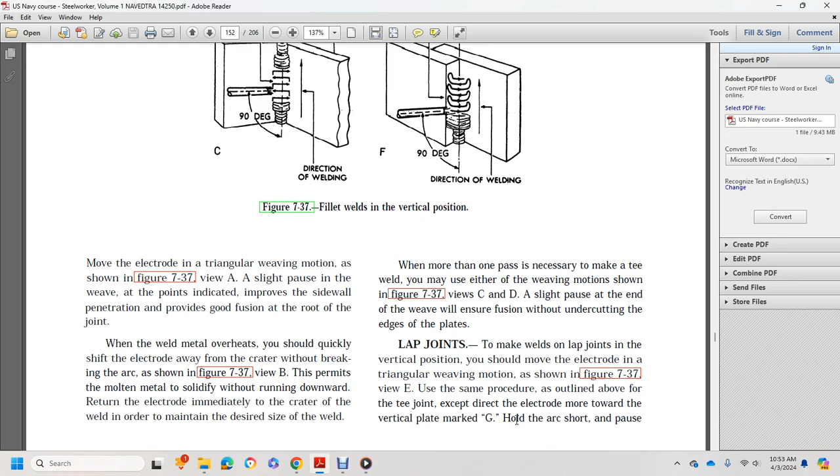Alright, lap joints. To make a lap joint weld in the vertical position, you should move the electrode in a triangular weaving motion shown in figure 7-37 view E. Use the same procedure outlined above for the T-joint, except direct the electrode more toward the vertical plate marked G. Hold the arc short and pause slightly at the surface of plate G. Try not to undercut either edge, and allow the molten metal to overlap the edges of the weave.

Lap joints on heavier plate may require more than one bead. If it does, clean the initial bead thoroughly. Place the subsequent beads as shown in figure 7-37 view F. Precautions to ensure good fusion and uniform weld deposit previously outlined for the T-joints also apply to the lap joints.

Alright, butt joints. Prepare the plates used for vertical welding identically to those prepared for welding in the flat position. To obtain good fusion and penetration with no undercutting, you should hold a short arc, and the motion of the arc should be carefully controlled. Butt joints beveled 1/4 inch thick can be welded in one pass by using a triangular weave motion shown in figure 7-38 view A.

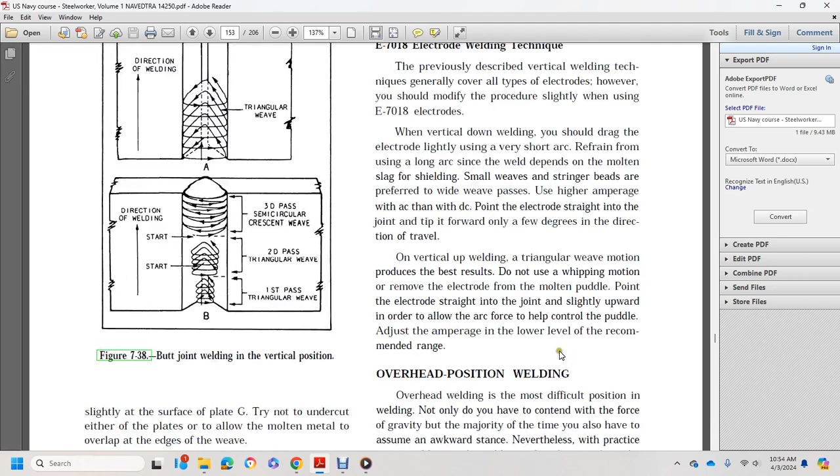Welds made on 1/2 inch plate or heavier should be made in several passes as shown in figure 7-38 view B. Deposit the last pass with a semicircular weaving motion with a slight whip up and pause of the electrode at the edge of the bead. That produces a good cover pass with no undercutting. Welds made on plates with a backup strip should be done in the same manner.

E7018 electrode welding technique. The previously described vertical welding technique generally covers all types of electrodes. However, you should modify the procedure slightly when using the E7018. For vertical down welding, you should drag the electrode lightly using a very short arc and refrain from long arcs, since the weld depends on molten slag for shielding. Small weave and stringer beads are preferred to wide weave passes. Use higher amperage with AC than DC. Point the electrode straight into the joint and tip it forward only a few degrees in the direction of travel.

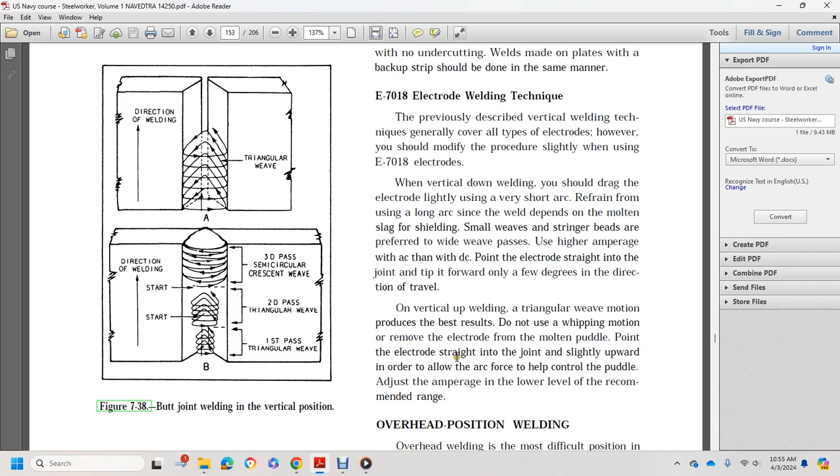On vertical up welding, a triangular weave motion produces best results. Do not use a whipping motion or remove the electrode from the molten pool. Point the electrode straight into the joint and slightly upward in order to allow the arc force to help control the puddle. Adjust the amperage to the lower level of the recommended range.

Overhead position welding. Overhead welding is the most difficult position in welding. Not only do you have to contend with the forces of gravity, but the majority of the time you also have to assume an awkward stance. Nevertheless, with practice it is possible to make welds equal to those made in the other positions.

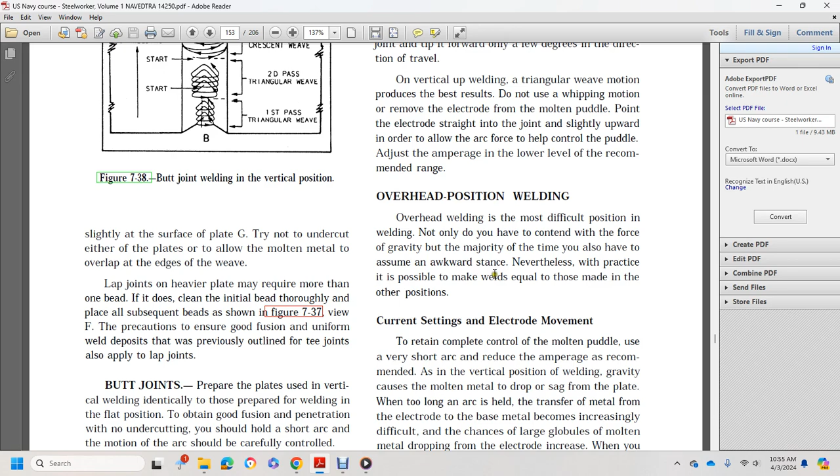Current setting and electrode movement. To retain complete control of the molten puddle, use a very short arc. Reduce the amperage as recommended. As in the vertical position of welding, gravity causes the molten metal to drop and sag from the plate. When too long an arc is held, the transfer of metal from the electrode to the base metal becomes increasingly difficult, and the chance of large globs of molten metal dropping from the electrode increases.

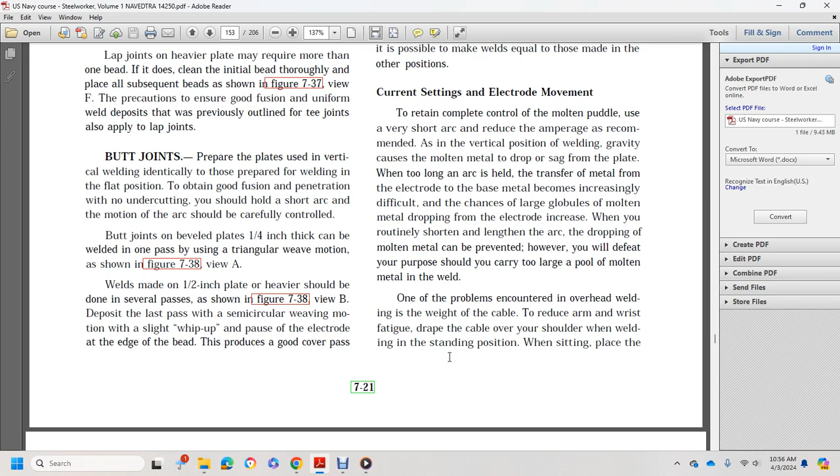When you routinely shorten and lengthen the arc, the dropping of molten metal can be prevented. However, you will defeat your purpose if you carry too large a molten pool of metal in the weld. One problem encountered in overhead welding is the weight of the cable. To reduce arm and wrist fatigue, drape the cable over the shoulder when welding in the standing position. When sitting, place the cable over the knee. With experience, cable placement will become second nature.

Warning: because of the possibility of falling molten metal, use a protective garment with a tight-fitting collar that buttons or zips up to the top of the neck. Roll down your sleeves and wear a cap and appropriate shoes.

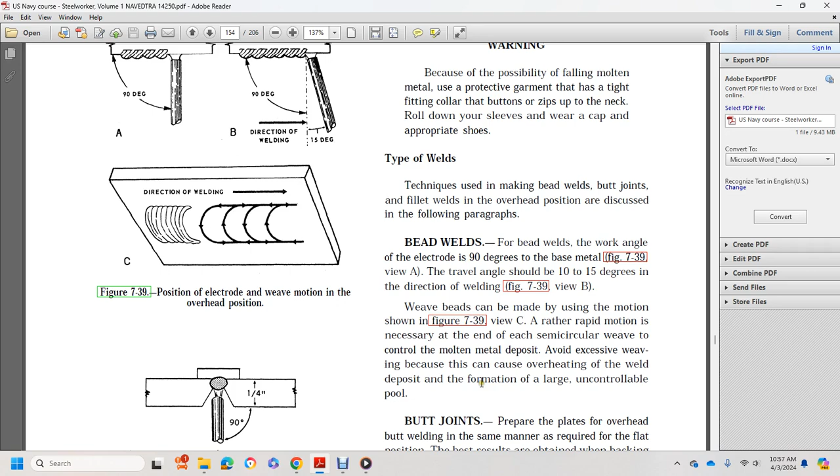Types of welds. Techniques used for making bead welds, butt joints, and fillet welds in the overhead position are discussed in the following paragraphs. Bead welds. For bead welds, the work angle of the electrode is 90 degrees to the base metal, and the travel angle should be 10 to 15 degrees in the direction of the weld. Weave beads can be made by using the motion shown in figure 7-39, and a rather rapid motion is necessary at the end of each semicircular weave to control the molten metal deposit. Avoid excessive weaving because it can cause overheating of the weld deposit and formation of a large, uncontrollable pool.

Alright, butt joints. Prepare the plates for overhead butt welding in the same manner as required for the flat position.

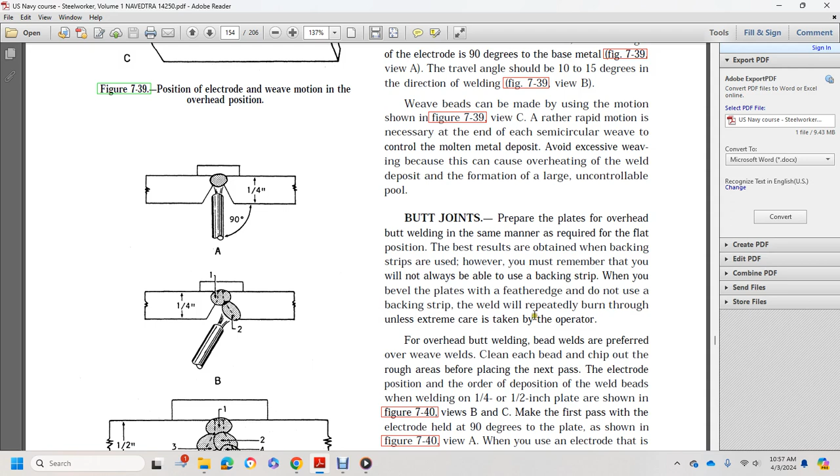Best results are obtained with the use of backing strips; however, you must remember that you will not always be able to use a backing strip. When you bevel the plates with a feather edge and do not use a backing strip, the weld is repeatedly burned through unless extreme care is taken by the operator. For overhead butt welding, bead welds are preferred over weave welds.

Clean each bead and chip out the rough areas before placing the next pass. Electrode position for deposition of the weld beads when welding 1/4 inch or 1/2 inch plate is shown in figure 7-40 views B and C. Make the first pass with the electrode held at 90 degrees to the plate, as shown in figure 7-40 view A. When you use an electrode that is too large, you cannot hold a short arc in the root area, with the result of insufficient root penetration and inferior joints.

Alright, figure 7-39 shows the position of the electrode, weaving motion, in the overhead position. Then you see A and direction B. Then it shows a multi-pass butt joint in the overhead position. You have it at 90 degrees, then the stacking of the beads.

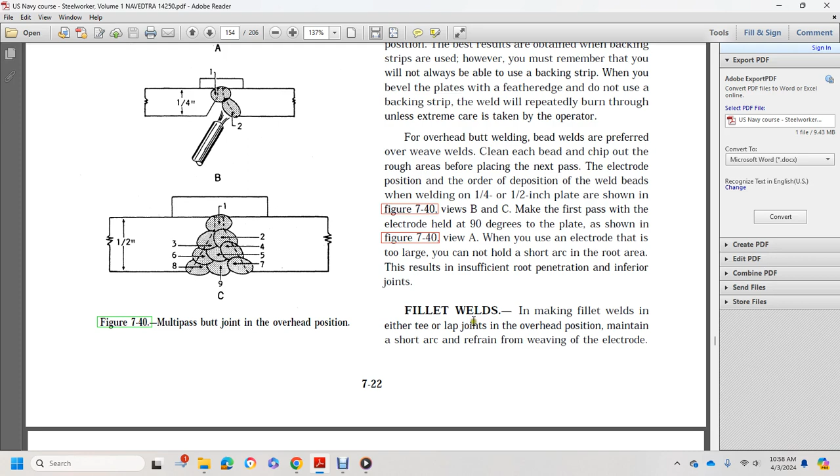When molten metal becomes too fluid and tends to sag, whip the electrode quickly away from the crater, avoiding lengthening the arc, allow the metal to solidify, immediately return the electrode to the crater, and continue welding. Overhead fillet welds, either T or lap joints on heavy plate, require several passes of beads to complete the joint. One example of an order of bead deposition is shown in figure 741 view A.

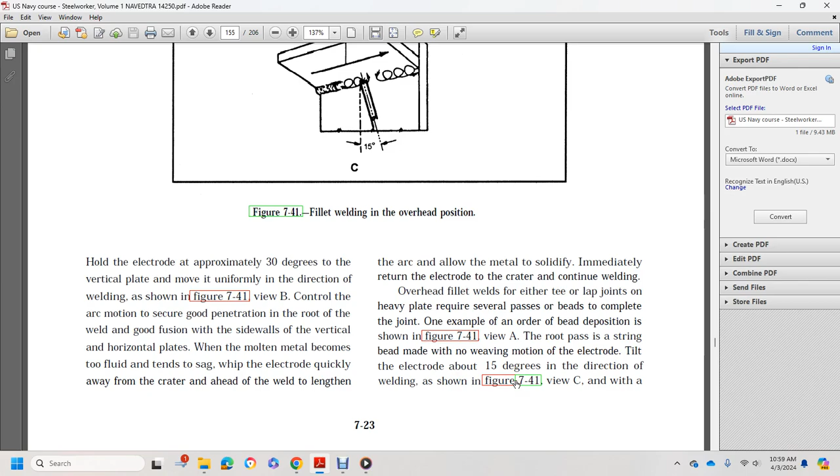The root pass is a string bead made with no weaving motion of the electrode. Tilt the electrode about 15 degrees in the direction of welding, as shown in figure 741 view C, with a circular motion when making the second, third, and fourth passes. Electrode motion permits greater control and better distribution of weld metal. Remove all slag and oxides from the surface of each pass by chipping and wire brushing before applying additional beads to the joint. And this shows

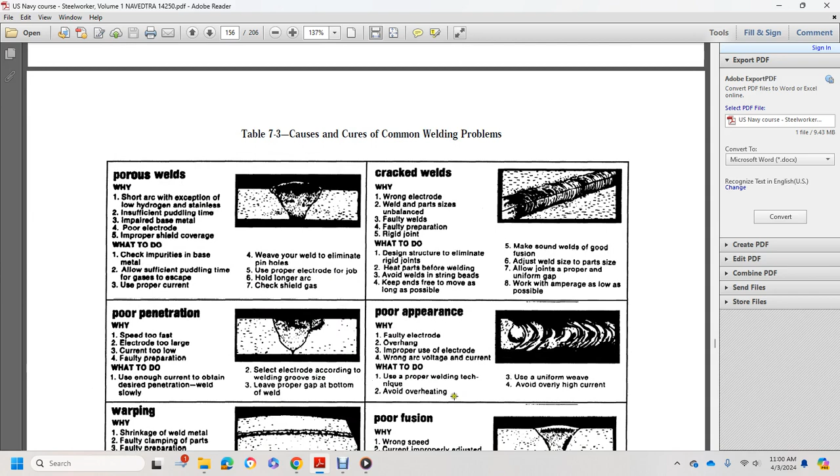causes and cures of common welds. You have porous welds, cracked welds, poor penetration, poor appearance, warping, poor fusion, undercutting, brittle welds, spatter, and magnetic blow. Welding difficulties: many of the welding difficulties in metal arc welding are the same as in oxygas welding, such as undercut, cracked welds, poor fusion, and incomplete penetration. Table 7.3 provides illustrations of most of the common welding problems encountered during the arc welding process.

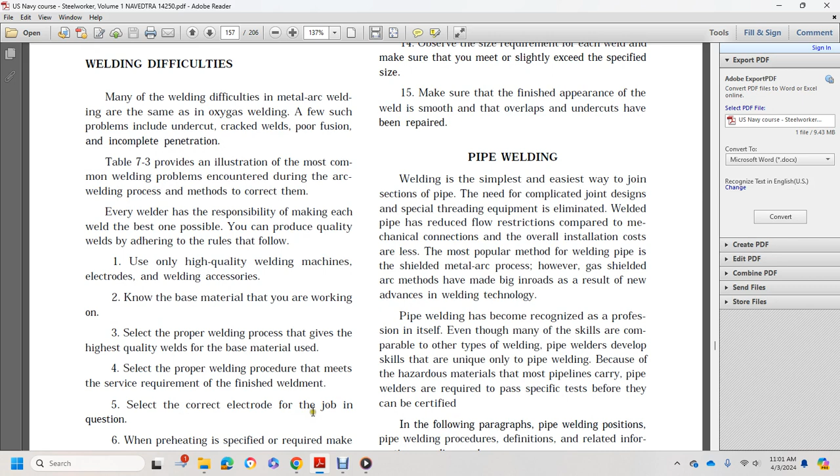Methods to correct them. Every welder has a responsibility to do their best to produce quality welds by adhering to these rules: 1. Use only high quality welding machines, electrodes, and welding accessories. 2. Know the base material that you're working with. 3. Select the proper welding process that gives the highest quality for the base material used. 4. Select the proper welding procedure that meets the service requirements of the finished weldment. 5. Select the correct electrode for the job in question. 6. When preheating is specified, meet the temperature requirements in all cases. Do not weld material that is below 32 degrees Fahrenheit without first preheating.

7. Clean the base metal of all slag, paint, grease, oil, moisture, or any other foreign material. Remove the weld slag thoroughly. Clean each bead before making the next bead or pass. Do not weld over cracks or porous tack welds. Remove defective tack welds before welding. Be particularly alert to obtain root fusion on the first pass of fillet and groove welds.

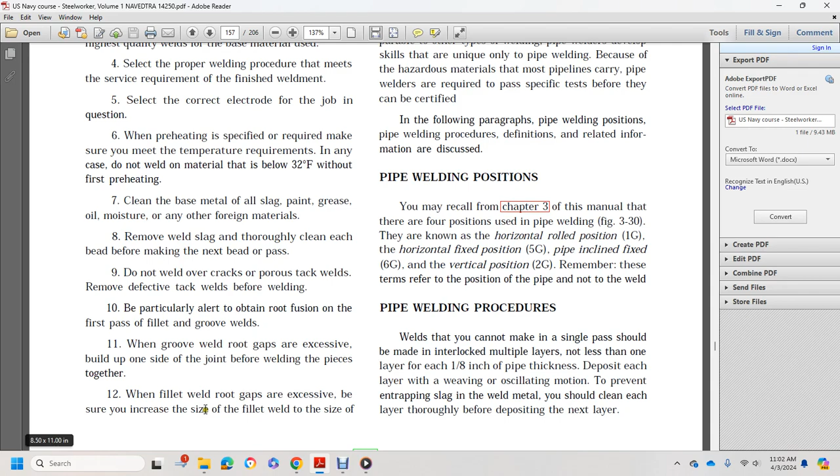11. When groove weld root gaps are excessive, build up one side of the joint before welding the pieces together. When fillet weld root gaps are excessive, be sure to increase the size of the fillet weld to the size of the root gap to maintain strength requirements. In some cases, it is advantageous to make a groove weld to avoid extremely large fillet welds.

13. Inspect the work immediately after completion and remove and replace defective welds. Observe the size requirement for each weld to make sure they meet or slightly exceed the specified size. 15. Make sure the finished appearance of the weld is smooth and that overlaps and undercuts have been repaired. Pipe welding.

Welding is the simplest, easy way to join sections of pipe. The need for complicated joint design and special threading equipment is eliminated. Welded pipe has reduced flow restriction compared with mechanical connections, and overall installation costs are less.

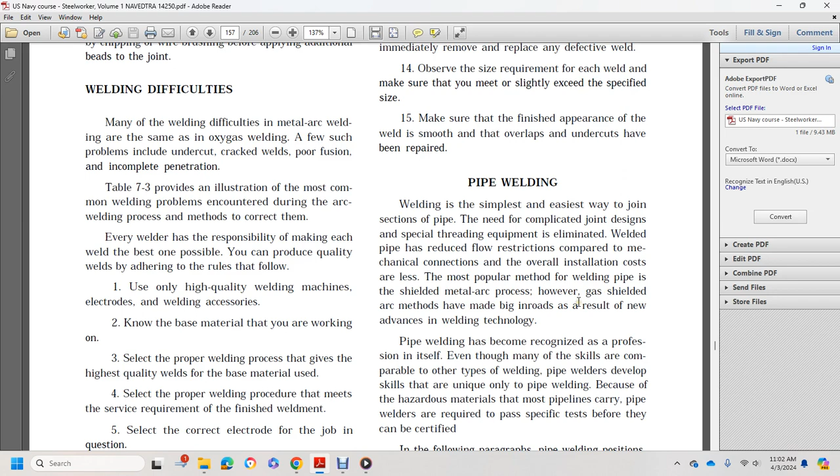The most popular method of welding pipe is the shielded metal arc process. However, the gas shielded arc methods have made big inroads as a result of new advances in welding technology. Pipe welding is recognized as a profession in itself, even though many of the skills are comparable with all the other types of welding.

Pipe welders develop skills unique to pipe welding because of the hazardous material that most pipelines carry. Pipe welders are required to pass specific tests before they can be certified. In the following paragraphs, pipe welding positions, pipe welding procedures, and related information are discussed.

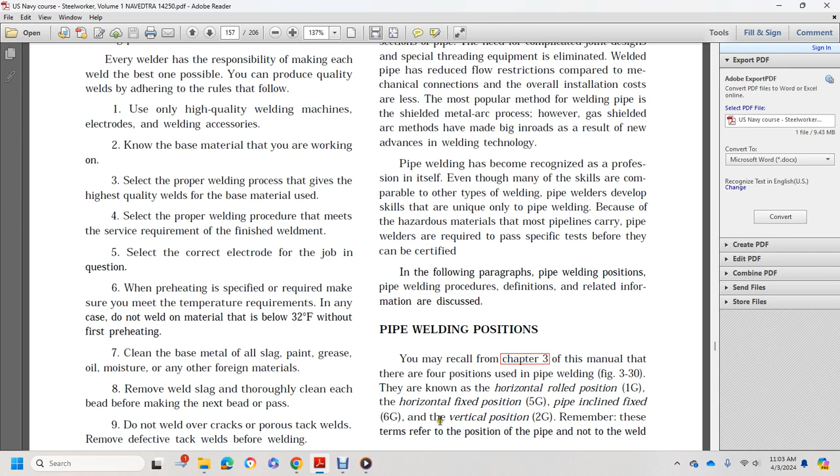Pipe welding positions: you may recall from Chapter 3 of the manual the four positions of pipe welding, known as horizontal rolled position 1G, horizontal fixed position 5G, pipe inclined fixed 6G, and vertical position 2G. Remember, these terms refer to the position of the pipe and not to the weld.

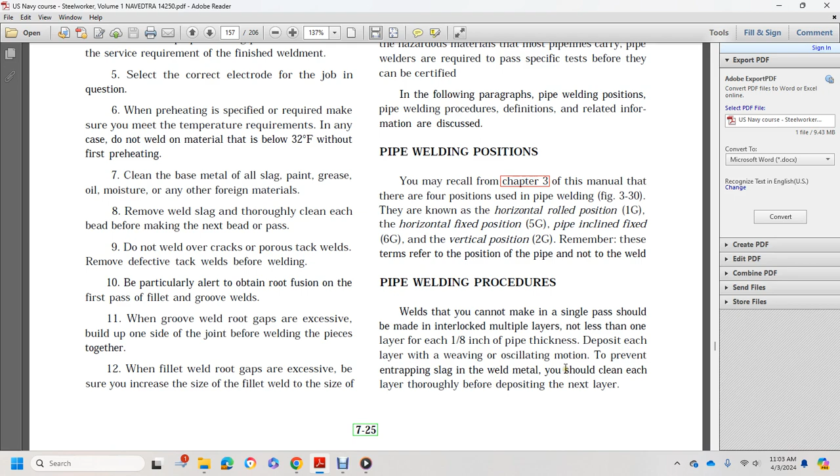Pipe welding procedures. Welds that cannot be made in a single pass should be made in interlocking multiple layers, not less than one layer for each 1/8 of an inch of pipe thickness. Deposit each layer with a weaving oscillation motion to prevent entrapping slag in the weld metal. You should clean each layer thoroughly before depositing the next layer.

Figure 7-42 shows butt joints, socket fittings, and elbows. Butt joints are commonly used between pipes and welded fittings. They are also used for butt welding flanges and welding stubs, making a butt joint of two pieces of pipe end to end for welding.

When the wall thickness of the pipe is 3/4 inch or less, you can use either a single V or a single U type butt joint. However, when the wall thickness is more than 3/4 of an inch, only a single U type should be used.

Fillet welds are used for welding slip-on and threaded flanges to pipe. Depending on the flange and the type of service, fillet welds are required on both sides of the flange, or a combination bevel weld. Fillet welds are used with welded socket couplings with the pipe, using single fillet welds, figure 7-42. Sometimes flanges require alignment; figure 7-44 shows one type of flange square used for vertical and horizontal alignment.

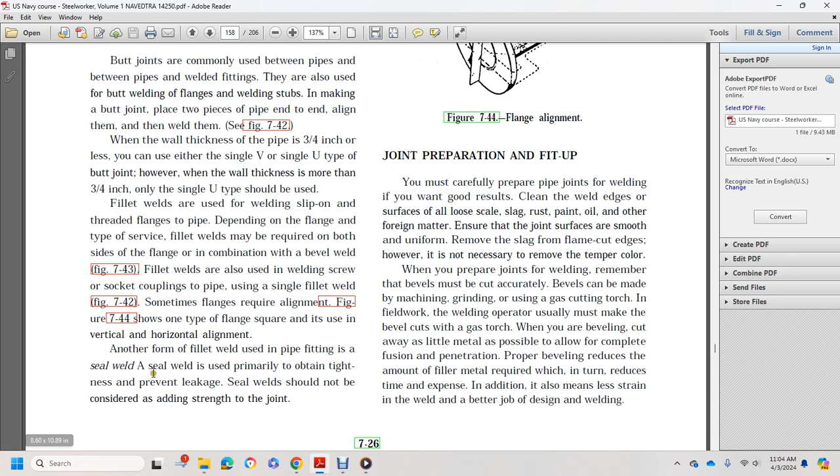Joint preparation and fit-up. Carefully prepare pipe joints for welding if you want good results. Clean the weld edge surfaces of all loose scale, slag, rust, paint, oil, and other foreign matter. Ensure the joint surface is smooth and uniform. Remove the slag from flame cut edges; however, it is not necessary to remove the temper color.

When you prepare joints for welding, remember the bevels must be cut accurately. Bevels are made by machine grinding or using gas cutting torches. In field work, the welding operator usually must make bevel cuts with a gas torch. Keep beveling and cutting as little as possible while allowing for complete fusion and penetration.

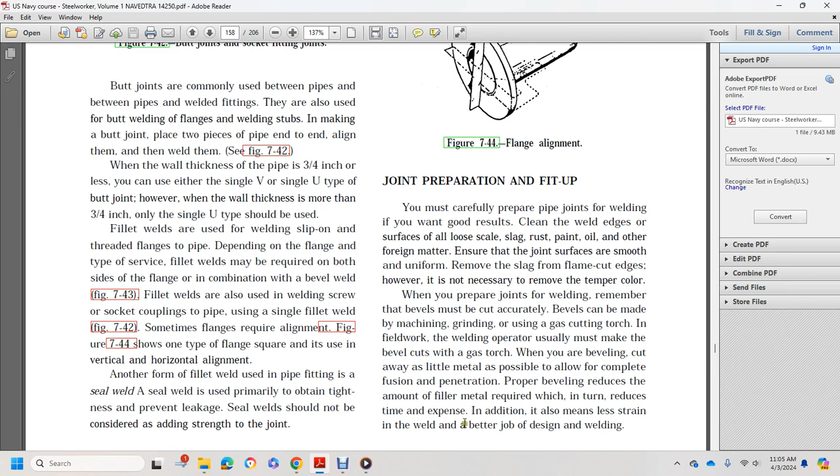Proper beveling reduces the amount of filler metal required, which in turn reduces the time and expense, and in addition means less strain in the weld and a better job of the weld.

Align the pipe before welding and maintain alignment during the welding operation, with a maximum alignment tolerance of 20% of pipe thickness. Ensure proper initial alignment. You should use clamps, jigs, and holding devices. A piece of angle iron makes a good jig for small diameter pipe, with a section of channel or an I-beam more suitable for larger diameter pipe.

Alright, tack welding. When the material is aligned, you may tack weld to hold it in place. Tack welding is one of the most important steps of pipe welding. As with any other type of welding, the number of tacks required depends on the diameter of the pipe. For 1/2 inch pipe, you may need 2 tacks placed directly opposite each other. As a rule, 4 tacks are adequate for a standard size pipe.

The size of the tack weld is determined by the wall thickness of the pipe. Be sure that the tack weld is not more than twice the pipe thickness in length, and 2/3 of the pipe thickness in depth. Tack welds should be the same quality as the final weld. Ensure that the tack welds have good fusion and are thoroughly cleaned before proceeding with the weld. Spacers.

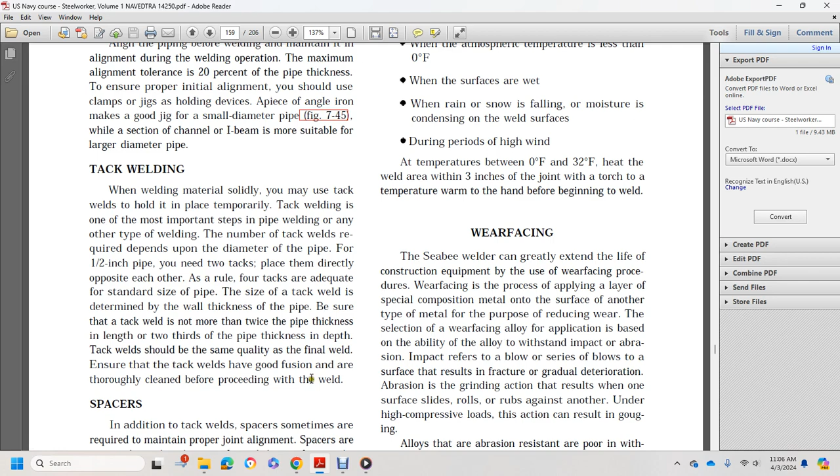In addition to tack welds, spacers are sometimes required to maintain proper alignment. Spacers are accurately machined pieces of metal that conform to the dimensions of the joint design used. Spacers are sometimes referred to as chill rings or backing rings. They serve a number of purposes: to provide a means for maintaining the specified root opening, provide a convenient location for the tack welds, and aid in pipe alignment. Additionally, spacers can prevent weld spatter and the formation of slag or icicles inside the pipe.

Electrode selection. Select the electrode best suited for the position and type of weld to be done. For the root pass of a multi-layer weld, you need an electrode large enough, but not exceeding 1/8 of an inch, to ensure complete fusion and penetration without undercutting and slag inclusion. Make certain the welding current is within the range recommended by the manufacturers of the welding machines and electrodes.

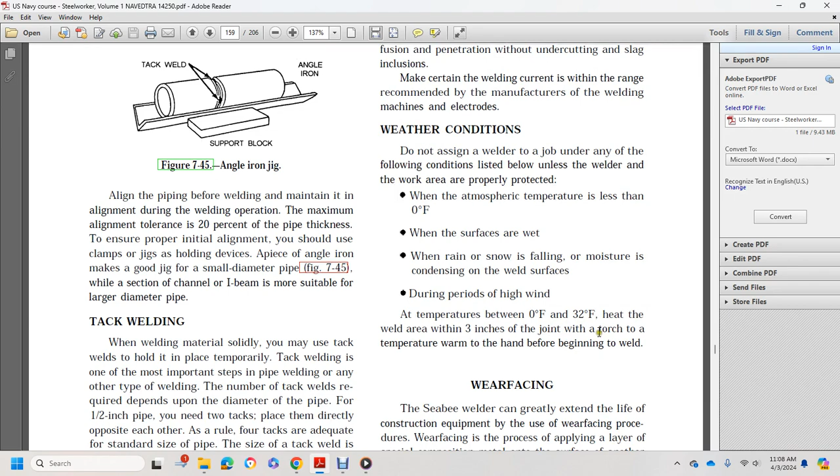Weather conditions. Do not assign a welder to a job under any of the following conditions unless the welder and the work area are properly protected: atmospheric temperature less than 0 degrees, when the surfaces are wet, when rain or snow is falling, moisture is condensing on the welding surface, or during periods of high wind. At temperatures between 0 and 32 degrees Fahrenheit, heat the welded area within 3 inches of the joint with a torch to a temperature warm to the hand, then begin welding.

Wear facing. The welder can greatly extend the life of construction equipment through the wear facing procedure. Wear facing is the process of applying a layer of special composition metal onto the surface of another type of metal for the purpose of reducing wear. Selection of the wear facing alloy for applications is based on the ability of the alloy to withstand impact and abrasion. Impact refers to a blow or series of blows to the surface, resulting in fracture, gradual deterioration. Abrasion is a grinding action that results when one surface slides, rolls, and rubs against another under high compressive loads. The action can result in gouging.

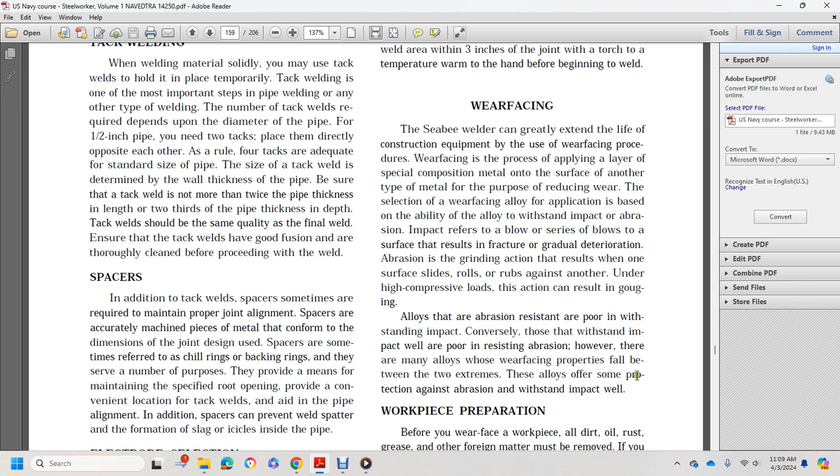Alloys that are abrasion resistant are poor at withstanding impact; conversely, those that withstand impact well are poor at resisting abrasion. However, there are many alloys whose wear facing properties fall between the two extremes. These alloys offer some protection against abrasion and withstand impact well.

Workpiece preparation. Before you wear face a workpiece, dirt, oil, rust, grease, and other foreign material must be removed. If you don't, your finished product will be porous and subject to spalling. You also need a solid foundation, therefore repair all cracks and remove any metal that is fatigued or rolled over. Preheating: depending on the type of metal, sometimes it's necessary to preheat the base metal. This lessens distortion, prevents spalling and cracking, and avoids thermal shock. Preheating temperature depends on the carbon and alloy content of the base metal, but in general, as the carbon content increases, so does the preheating temperature. Improper heating can adversely affect the metal, reducing resistance to wear by making it hard and brittle, and by making it prone to oxidation and scale.

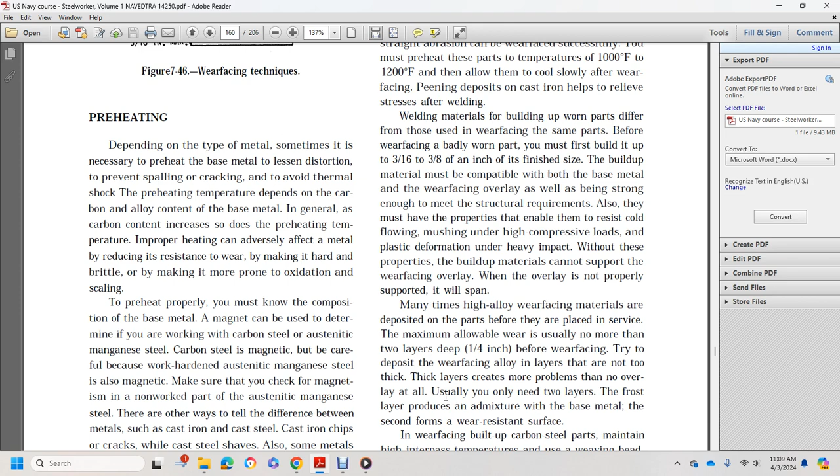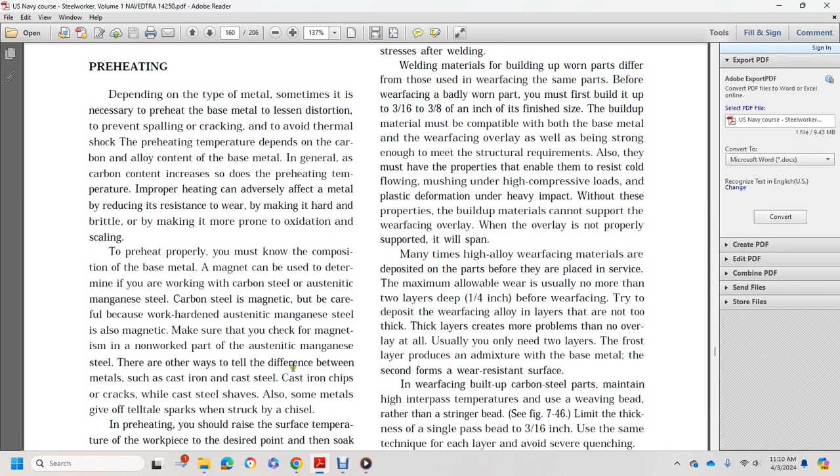To preheat properly, you must know the composition of the base metal. A magnet can be used to determine if you're working with carbon steel or austenitic manganese steel. Carbon steel is magnetic, but be careful, because work-hardened austenitic manganese steel is also magnetic. Make sure that you check with the magnet on a non-worked part of the austenitic manganese steel. There are other ways to tell the difference between metals such as cast iron and cast steel. Cast iron chips or cracks, while cast steel shaves. And also some metals give telltale sparks when struck with a chisel.

Preheating should raise the surface temperature of the workpiece to the desired point, then hold it until the heat reaches its core. After wear facing, cool the workpiece slowly. Techniques: when possible, position the workpiece for downhand welding. This allows you to finish the job quicker. Building up or wear facing cast iron is generally not recommended because cast iron tends to crack. However, some cast iron parts subject to straight abrasion have been wear faced successfully. Preheat the parts to a temperature of 1,000 to 1,200 degrees Fahrenheit, and allow them to cool slowly after wear facing. Peening deposits on cast iron helps to relieve stress after welding.

Welding materials used to build up the worn parts differ from those of either the wear facing or the base worn part. When you first build up to within 3/16 of an inch to 3/8 of an inch of the finished size, the build-up material must be the most compatible with both the base metal and the wear facing overlay, as well as being strong enough to meet the structural requirements.

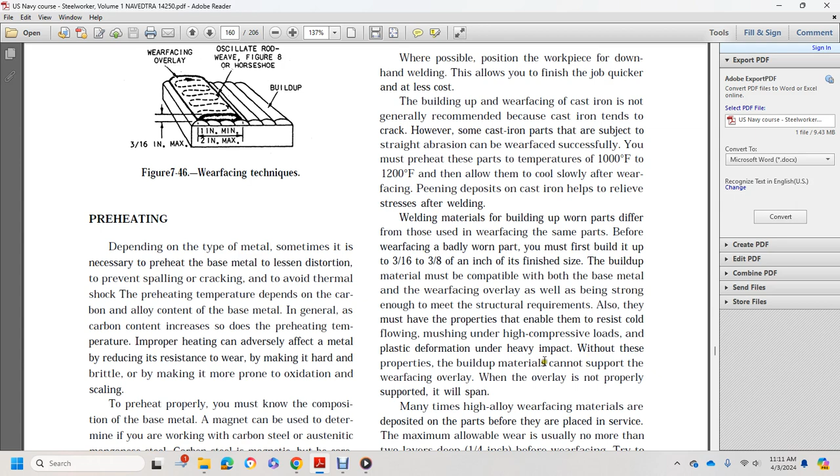Also, they must have the properties to enable them to resist cold flowing, mushing under high compressive loads, and plastic deformation under heavy impact. Without these properties, the build-up material cannot support the wear facing overlay. When the overlay is not properly supported, it will spall.

Many times, high alloy wear-facing materials are deposited on the parts before they are placed in service, and usually no more than 2 layers deep, 1/4 inch. Try to deposit wear-facing alloy in layers that are not too thick. Thick layers can create more problems. You only need 2 layers; the first layer produces a mixture of the base metal, and the second forms the wear-resistant surface.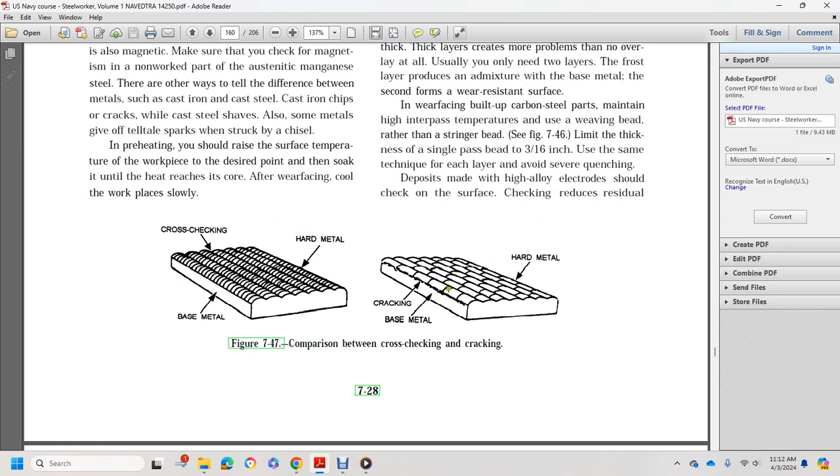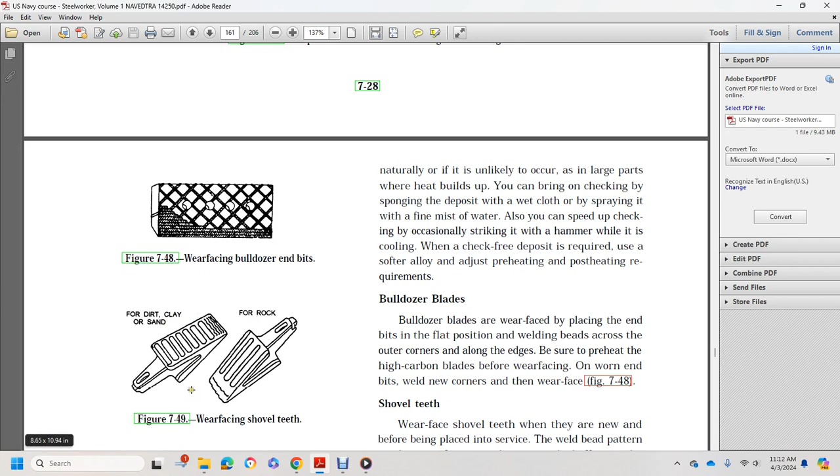Figure 748, wear-facing bulldozer end bits. Figure 749, wear-faced shovel teeth, for dirt and clay or sand, and for rock. It shows waffle cross hatching.

Without checking, the combination of residual stress and service stress may exceed the tensile strength and cause a deep crack or spalling, so be sure to induce checking if it does not occur naturally. On large parts with heat build-up, you bring on the checking by sponging the deposit with a wet cloth or spraying it with a fine mist of water. You can also speed up the checking by occasionally striking it with a hammer while it's cooling. If a check-free deposit is required, use a softer alloy and follow preheating and post-heating requirements.

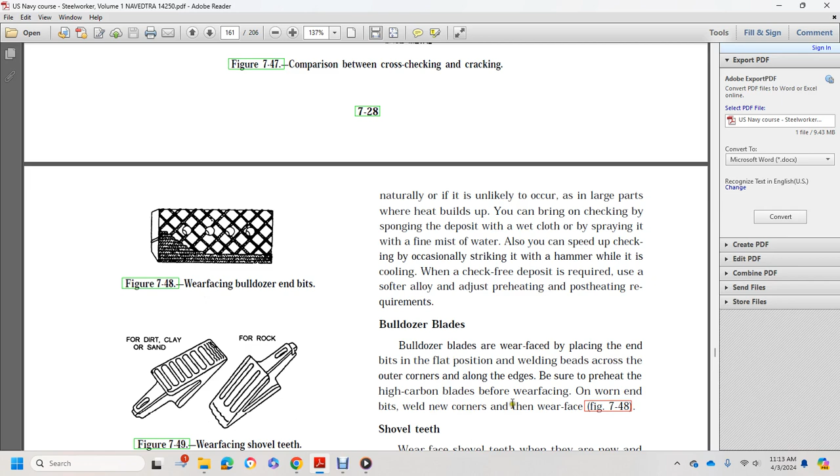Bulldozer blades are wear faced by placing the end bits in the flat position, welding beads across the outer corners and along the edge. Be sure to preheat the high-carbon blades. When wear facing worn end bits, weld on new corners and wear face them. Figure 748.

Shovel teeth wear facing. Wear face shovel teeth when they are new, before placing them in service, with a welded bead pattern. Wear facing extends the service life. When wear facing shovel teeth that work mainly in rock, run beads the length of each tooth, which allows the rock to ride on the hard metal beads.

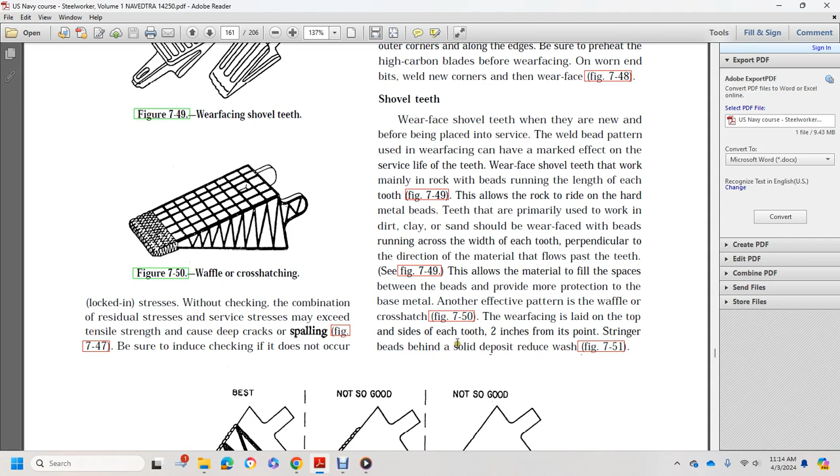Teeth that are primarily used to work in dirt, clay, and sand should be wear faced with beads running across the width of each tooth, perpendicular to the direction of the material that flows past the teeth. This allows material to fill spaces between the beads and provide more protection to the base metal. Another effective pattern is the waffle or crosshatch. Wear facing is laid on the top and sides of each tooth, 2 inches from its point. Stringer beads, behind a solid deposit, reduce wash.

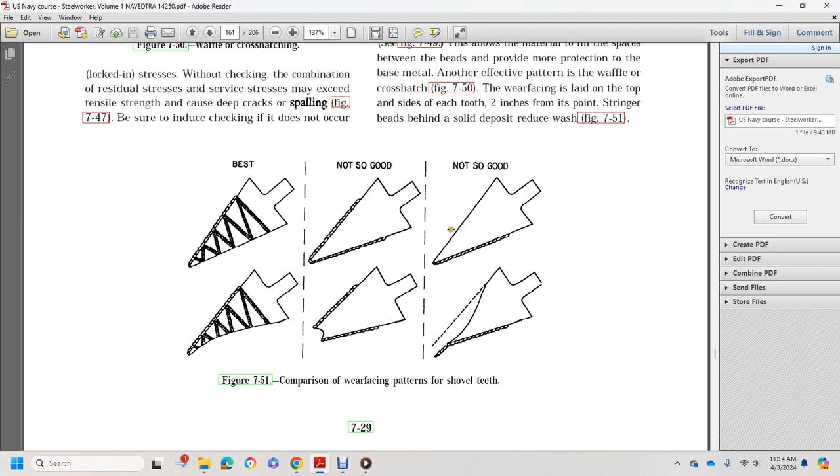This shows a comparison of wear facing patterns on shovel teeth: the best, not so good, not so good. Table 7.4 shows the recommended electrode size, current and travel speed for carbon arc cutting different thicknesses of steel plate.

More information on wear facing application may be obtained from the NCF Welding Materials Handbook, NAVFAC P-433. Carbon arc cutting. Carbon arc cutting is clean because no foreign metals are introduced at the arc. Cutting current should be 25 to 50 amps above the welding current for the same thickness of metal. The carbon electrode point should be ground very sharp for arc cutting.

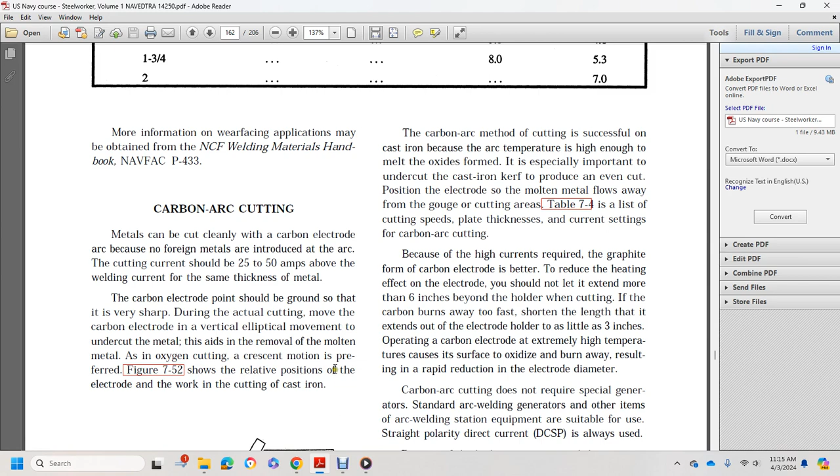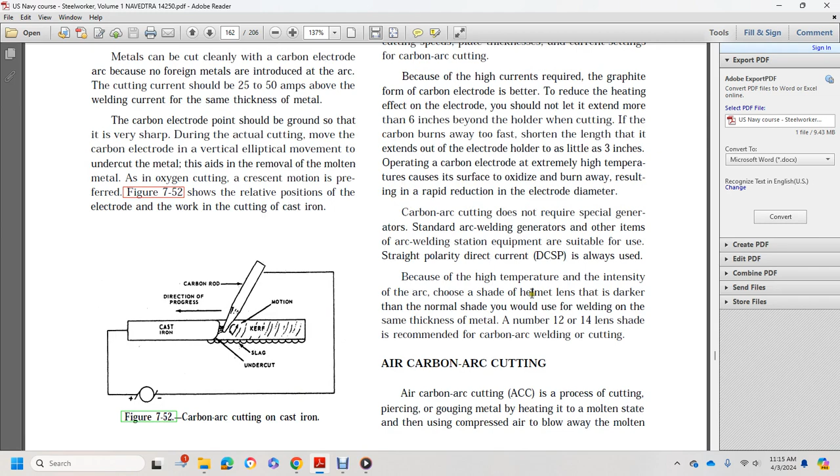The actual cutting is done by moving the carbon electrode in a vertical elliptical movement to undercut the metal. This aids the removal of the molten metal. As in oxygen cutting, the crescent motion is preferred. Figure 752 shows the relative position of the electrode and work in cutting cast iron: carbon rod, direction of progress, slag, undercut, motion, cast iron, positive, negative. The carbon arc method of cutting is successful with cast iron because the arc temperature is high enough to melt the oxide formed, and it is especially important to undercut the cast iron to produce an even cut.

Position the electrode so the molten metal flows away from the gouging or cutting area. Table 7.4 lists the cutting speeds, plate thickness, and current settings for carbon arc cutting.

Because of the high currents required for the graphite carbon electrode, to reduce the heating effect, you shall not let it extend more than 6 inches beyond the holder when cutting. If the carbon burns away too fast, shorten the extent of the electrode beyond the holder to as little as 3 inches.

Operating the carbon electrode at extreme high temperature causes its surface to oxidize and burn away, resulting in a very rapid reduction in electrode diameter.

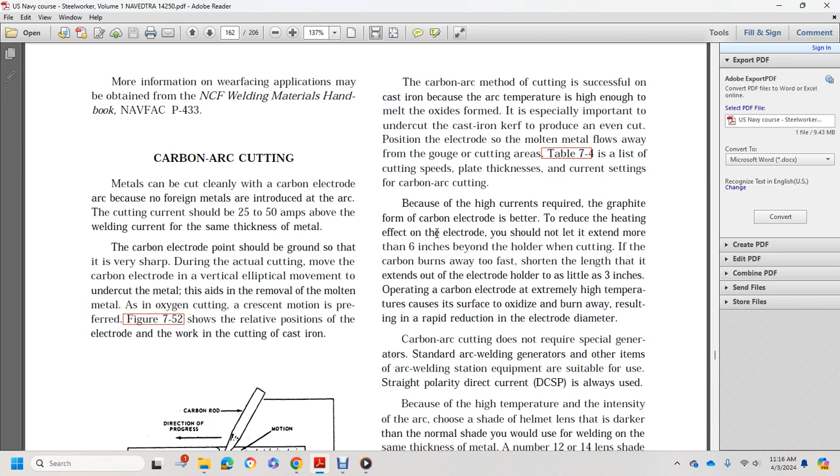Carbon arc cutting does not require special generators. Standard arc welding generators and other standard arc welding station equipment are suitable for the use. Straight polarity direct current is always used.

Because of the high temperature and intensity of the arc, you should use a darker shade helmet lens than you would for welding on the same thickness of metal. A number 12 or 14 lens is recommended for carbon arc cutting.

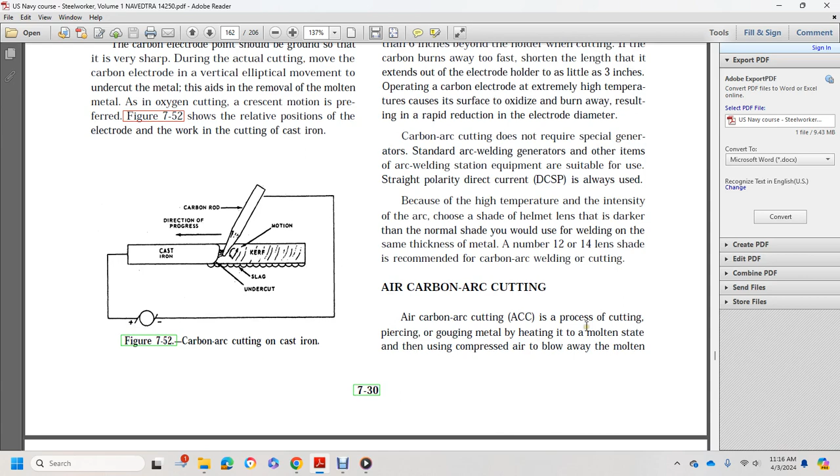Air carbon arc cutting is the process of cutting or gouging metal by heating it into a molten state, then using compressed air to blow away the molten metal.

Figure 753 shows the process equipment, which consists of a special holder shown in figure 754. It uses carbon graphite electrodes, with compressed air delivered through a jet built into the electrode holder. A push button or lever on the hand-held electrode controls the air jet.

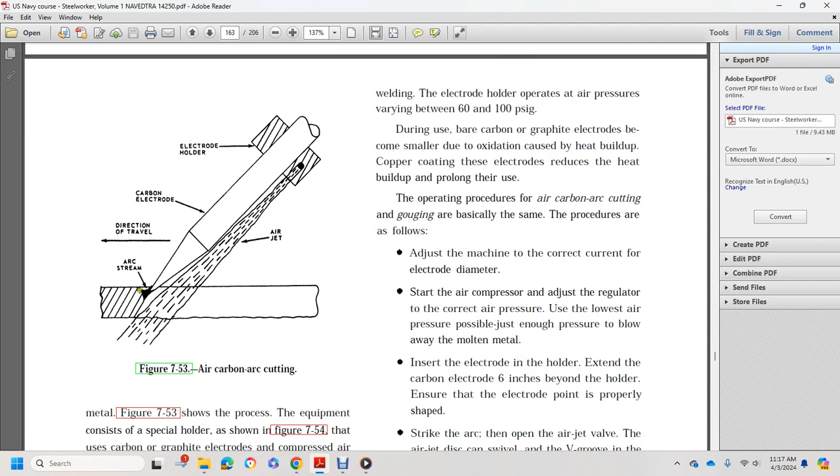Figure 753 shows the air carbon arc cutting setup: arc stream direction, travel direction, carbon electrode, holder, and air jet. The air jet blows away the molten metal, usually leaving a surface that needs no further preparation for welding. The electrode holder operates with air pressure varying between 60 to 100 psi gauge.

A bare carbon graphite electrode becomes smaller due to oxidation caused by heat buildup. Copper coating on these electrodes reduces the heat buildup and prolongs their use.

The operating procedure for air carbon arc cutting and gouging is basically the same. The procedure begins with setting the machine to the correct current for the electrode diameter.

Start the air compressor and adjust the regulator to the correct air pressure. Use the lowest air pressure possible, just enough to blow away the molten metal. Insert the electrode into the holder.

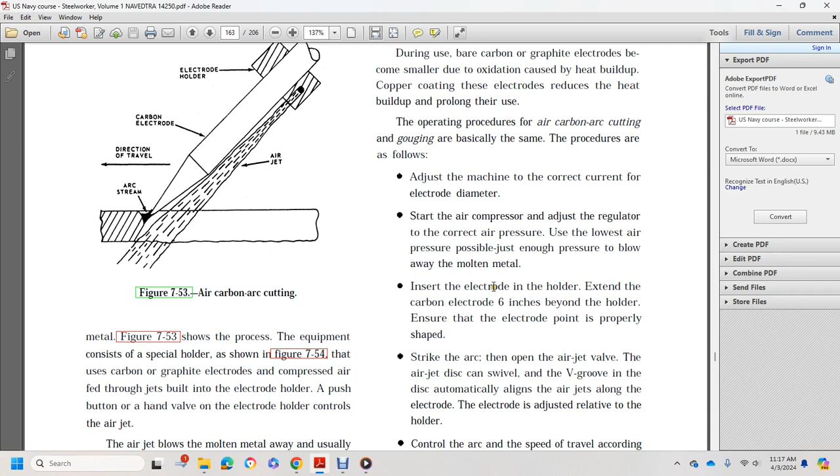Extend the carbon electrode no more than 6 inches beyond the holder, and ensure the electrode point is properly shaped. Strike the arc, then open the air jet valve; the air jet disc can swivel, and the V-groove in the disc automatically align the air jet with the electrode.

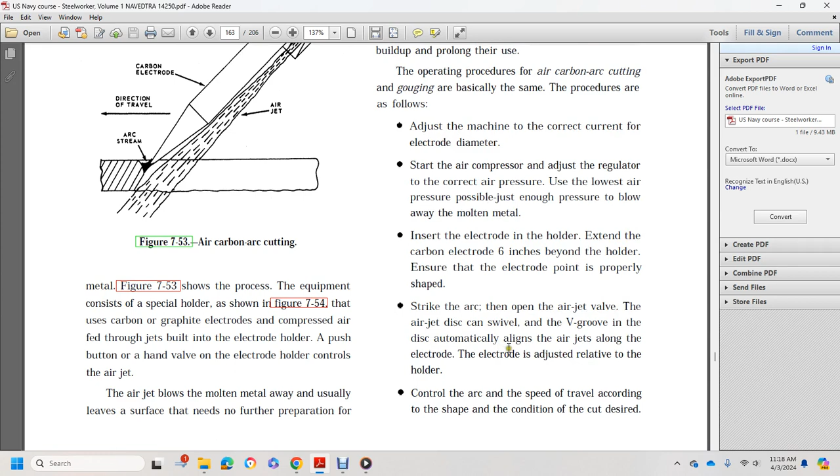The electrode position is adjusted relative to the holder. Control the arc and travel speed according to the shape and condition of the cut desired.

Figure 755 shows a V-groove cut into 2-inch thick carbon steel. Always cut away from the operator, since molten metal sprays a distance from the cut. This cutting action may be used to cut or gouge metal in flat, horizontal, vertical, or overhead positions.

Air carbon arc gouging is useful for many metal working applications: metal shaping, welding preparation, and gouging. The electrode holder and electrode shape slope back with the direction of travel. The blast direction aligns with the electrode. toward the arc. The depth and contour of the groove are controlled by the electrode angle and travel speed; the groove's width is governed by the diameter of the electrode.

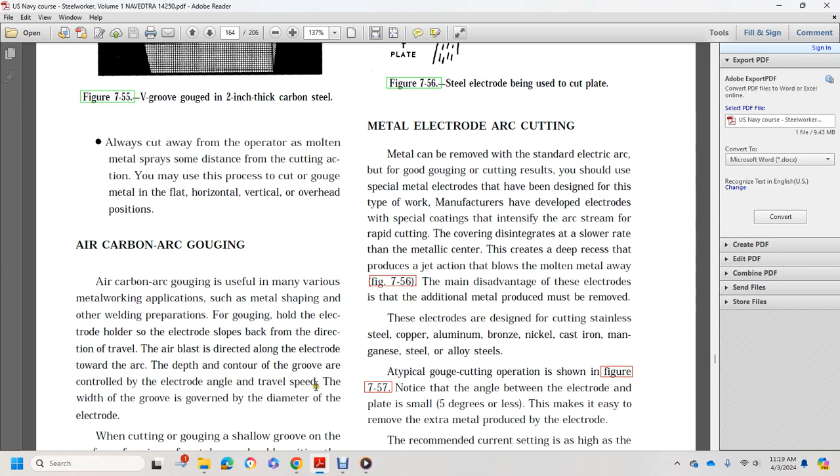When cutting or gouging a groove on the surface of a plate or piece of metal, position the electrode holder at a very flat angle relative to the work. Travel speed and current setting determine the depth of the groove: the slower the movement and the higher the current, the deeper the groove.

For example, the V-groove made in 2-inch thick mild steel plate using a machine-guided carbon arc air jet is shown in figure 755.

Metal electrode arc cutting: metal can be removed using a standard electrical arc for gouging or cutting results, and special metal electrodes have been designed for either type of work, depending on manufacturer design.

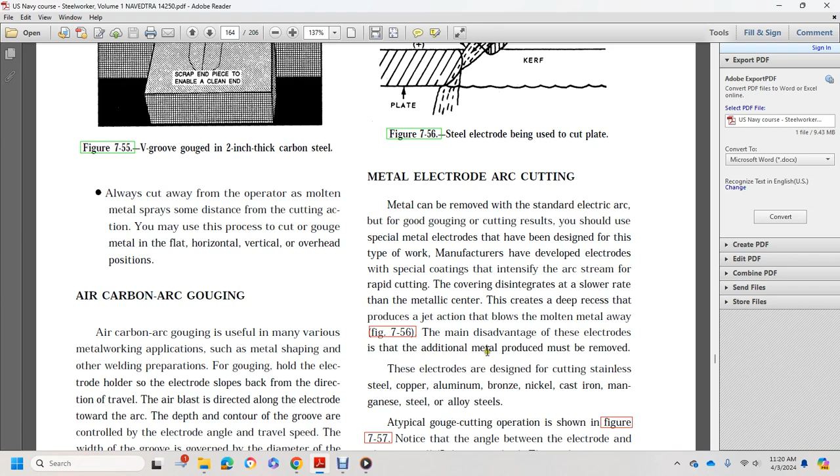Developed electrodes with special cutting intensity arc stream create a rapid cutting cover that disintegrates at a slower rate, with a metallic center creating a deep recess. The jet action produced blows molten metal away. Figure 756 shows the main disadvantage of these electrodes: additional metal produced must be removed. Electrodes are designed for cutting stainless steel, copper, aluminum, bronze, nickel, cast iron, manganese steel, and alloy steels.

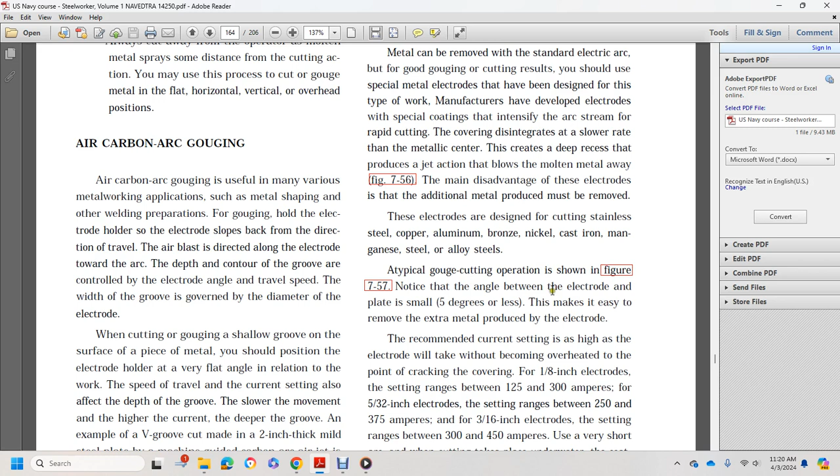All typical gouging and cutting operations are shown in figure 7-57. Note the angle between the electrode and the plate is small, 5 degrees or less, which makes it easy to remove the extra metal produced by the electrode.

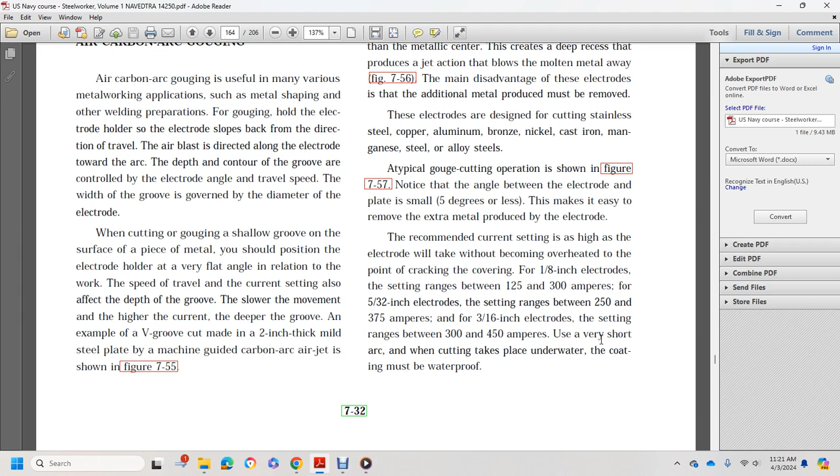Use a very short arc when cutting takes place underwater. The coating must be waterproof. Figure 7-57 shows the gouging and cutting operation using a solid core arc cutting electrode.

Welding quality control and fabrication requirements include equipment tests to determine the quality and soundness of the welds. Many different tests have been designed for specific faults, depending on the requirements of the weld and available test equipment. In this section, non-destructive testing is briefly discussed.

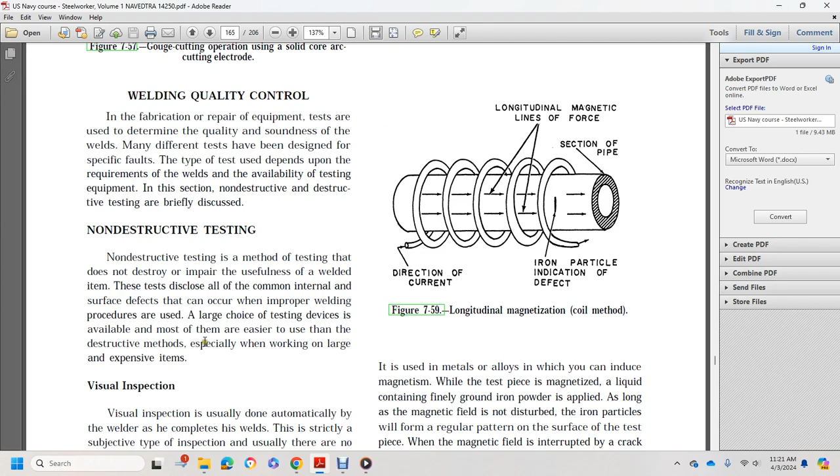Non-destructive testing methods do not destroy or impair the usefulness of the weld. The tests can disclose common internal and surface defects that occur from improper welding procedures. There is a large choice of testing devices available, and most are easier to use than destructive methods, especially when working on large and expensive items.

Visual inspection is done automatically by the welder as he completes his weld, but it is strictly a subjective type of inspection. Usually, if there are no defined limits of acceptability, the welder may use templates or a weld bead contour check. Visual inspection basically becomes a comparison of the finished weld with accepted standards, effective only for the visual quality of the weld.

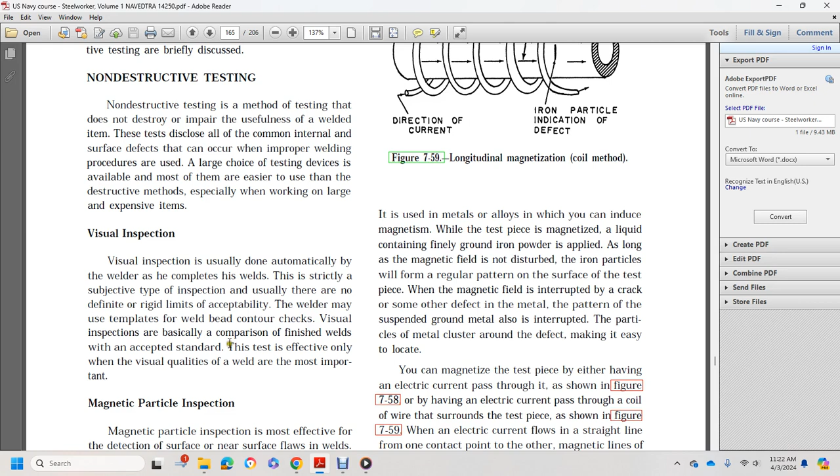One of the most important methods is magnetic particle inspection. It is most effective for detecting surface and near-surface flaws in the weld, and is used on metal alloys in which magnetism can be induced.

A liquid containing fine ground iron powder is applied to the magnetized test piece along its magnetic field when the field is not disturbed. The iron particles will form a regular pattern on the surface of the test piece. Where the magnetic field is interrupted by a crack or other defect in the metal, the pattern of the suspended iron particles is also interrupted, making the defect easy to locate.

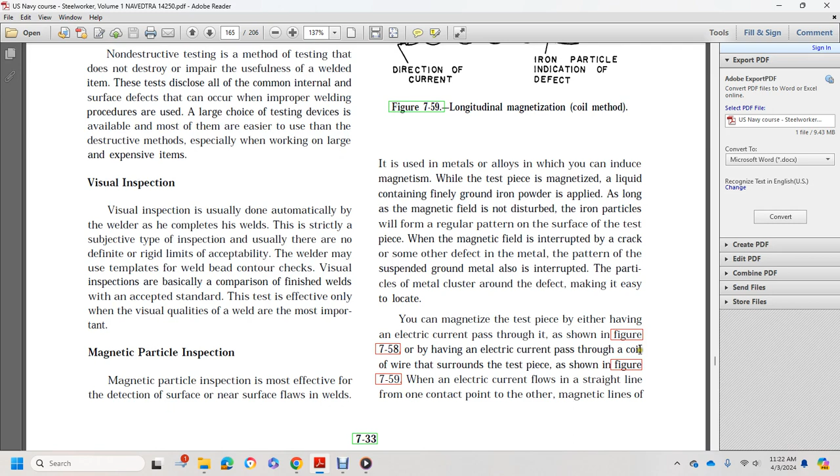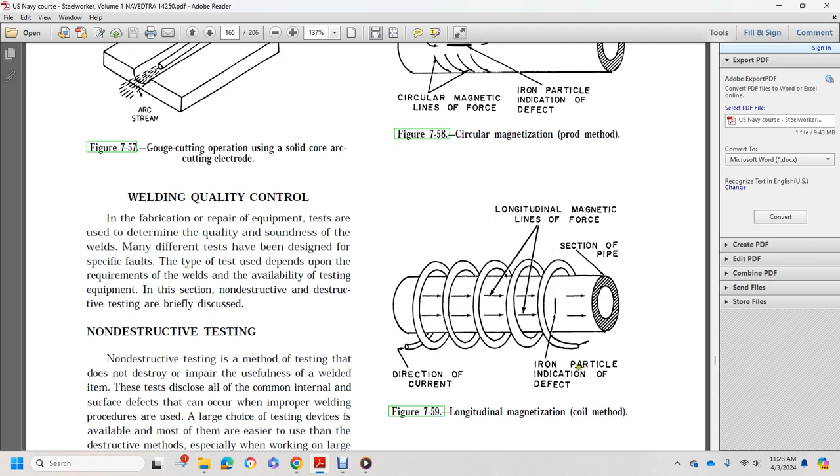You can magnetize the test piece either by having an electrical current pass through it, shown in figure 758, or by having an electrical current pass through a coil of wire surrounding the test piece, shown in figure 759. Figure 7-58 shows the direction of current in a prod on a section of pipe, the circular magnetic lines of force, and the iron particle indication of a defect. It also shows longitudinal magnetism, with the direction of current, iron particle indication, and longitudinal magnetic lines of force on a section of pipe.

Magnetic forces run in a circular direction as shown in figure 758, with current flowing through the piece itself. With current flowing through a coil around the test piece as shown in figure 759, the magnetic lines run longitudinally through the piece. A defect shows up as a disturbance in the pattern of iron particles; the direction of the magnetic field must be at a right angle to the major axis of the defect, so the necessary field direction is established by having the current flow parallel to the major axis of the defect.

Since the orientation of the defect is unknown, different current directions must be used during the test. As shown in figure 758, circular magnetism is induced into the test piece so you can inspect for lengthwise cracks. Longitudinal magnetism, shown in figure 759, is induced so you can inspect the piece for transverse cracks. In general, magnetic particle inspection is satisfactory for detection of cracks and subsurface defects that are not more than 1/4 inch below the surface.

The type of magnetic particle inspection equipment commonly used by the Navy is the portable low voltage unit, which has a maximum magnetizing output of 1,000 amperes. It can operate on either alternating or direct current, and is ready to operate once plugged into the voltage supply specified by the manufacturer.

A pair of heavy copper contact prods, two 5-foot lengths with flexible cable. Cable fittings are designed to fit either end of the cable, connected to the unit's prods.

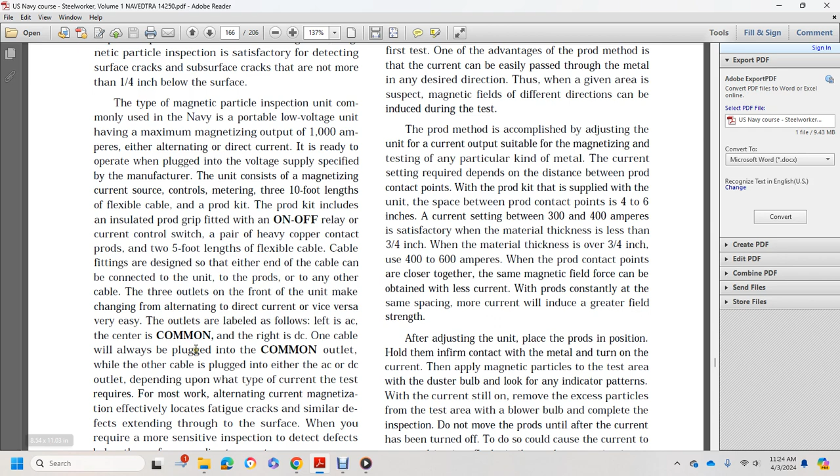One cable plugs into the common outlet, while the other cable is plugged into either the AC or DC outlet, depending upon the type of current the test requires.

Alternating current magnetization most effectively locates fatigue cracks and similar defects at or near the surface. When you require a more sensitive inspection to detect defects below the surface, use direct current.

You can use the unit with alternating or direct current in two ways: with the prods attached to flexible cable, making contact so the current passes into and out of a portion of the test piece, setting up a circular magnetic field between the prods and their contact points, as shown in figure 758.

And second, with the flexible cable wrapped around the work to form a coil, inducing longitudinal magnetism in the part of the workpiece within the coil.

Although you can use either of the two methods, the prod method is probably easier to apply and in most instances is effective for detecting surface defects. However, only a small area of the test piece can be magnetized at one time with the prod method.

The magnetized area is limited to the distance between prod contact points and a few inches on each side of the current path. You must check the entire surface being tested, and adjacent areas must be covered by changing the location of the prod contact points.

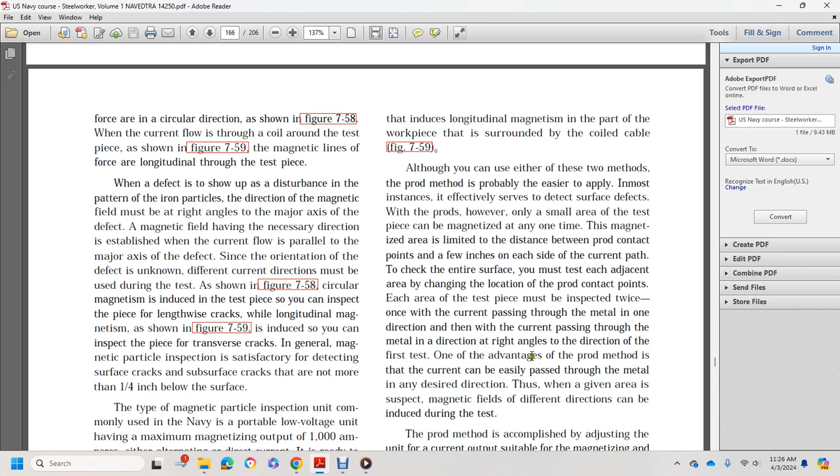Each part of the test piece must be inspected twice: once with current passing through the metal in one direction, and once with current passing through the metal at a right angle to the direction of the first test. One advantage of the prod method is that current can easily be passed through the metal in any desired direction.

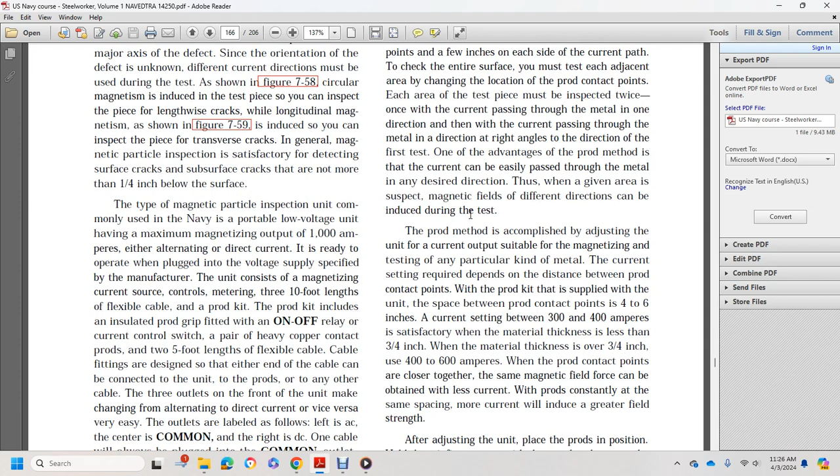Thus, in a given area, magnetic fields of different directions can be induced during the test. The prod method also allows adjusting the current output suitable for magnetizing and testing a particular kind of metal. The current setting required depends on the distance between the prod contact points.

The prod kit supplied with the unit spaces the prod contact points 4 to 6 inches apart. Current setting is between 300 and 400 amps, satisfactory for material thickness less than 3/4 of an inch.

When materials are over 3/4 inch thick, use 400 to 600 amps. With prod contact points closer together, the same magnetic field strength can be obtained with less current. With the prods at a constant spacing, more current will induce greater field strength.

After adjusting the unit and placing the prods in position, ensure firm contact with the metal, then turn on the current, apply the magnetic particle with the tester's duster bulb, and look at the indicator pattern with the current still on.

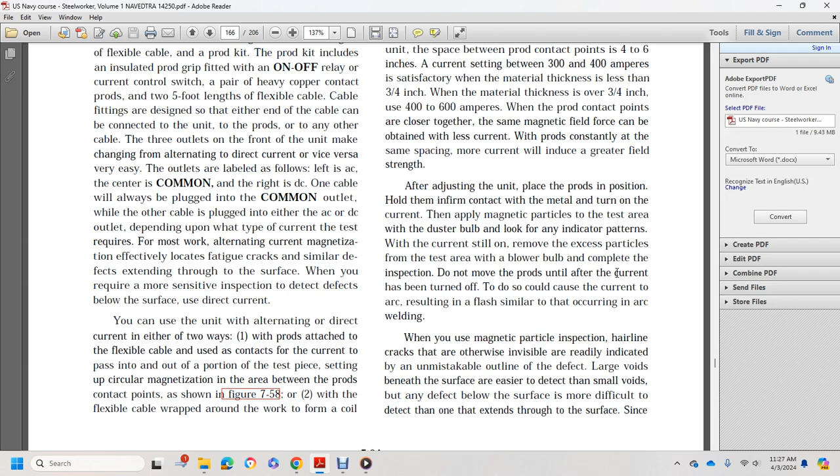Remove the excess particles with the tester's blower bulb to complete the inspection. Do not move the prods until after the current has been turned off. To do so could cause a current arc, resulting in a flash similar to the arcing in arc welding.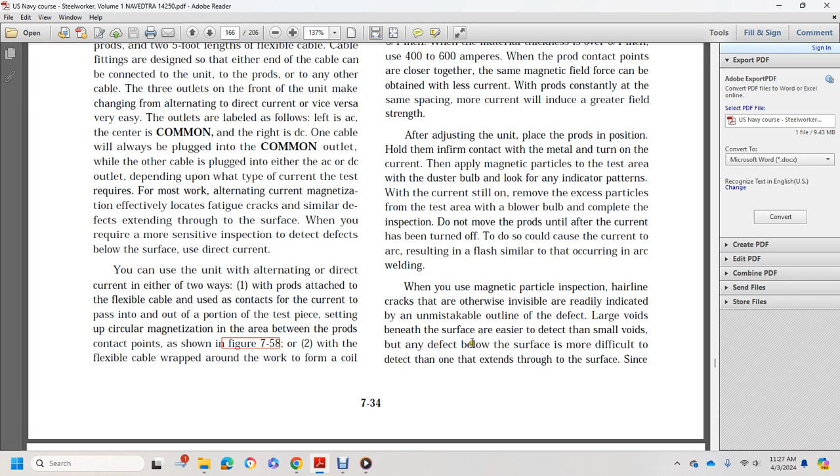With magnetic particle inspection, hairline cracks otherwise invisible are readily located by the unmistakable outline of the defect. Large voids beneath the surface are easier to detect than small voids, and any defect below the surface is more difficult to detect than one that extends through the surface.

False indications frequently occur, so the inspector must be able to correctly interpret the particle indications that appear.

Factors that help the interpreter of the test results include the amount of magnetizing current applied, the shape of the indication, sharpness of the outline, width of the pattern, and the height of the buildup of particles.

These characteristics do not determine the seriousness of the fault, but they do serve to identify the kind of defect. The indication of a crack is sharp and well-defined, with a clearly defined buildup of magnetic particles.

An indication produced with relatively low magnetizing current tends to appear as a straight, sharp, fine line, with the buildup of particles relatively weak. The magnetizing current must be higher than that required to detect cracks.

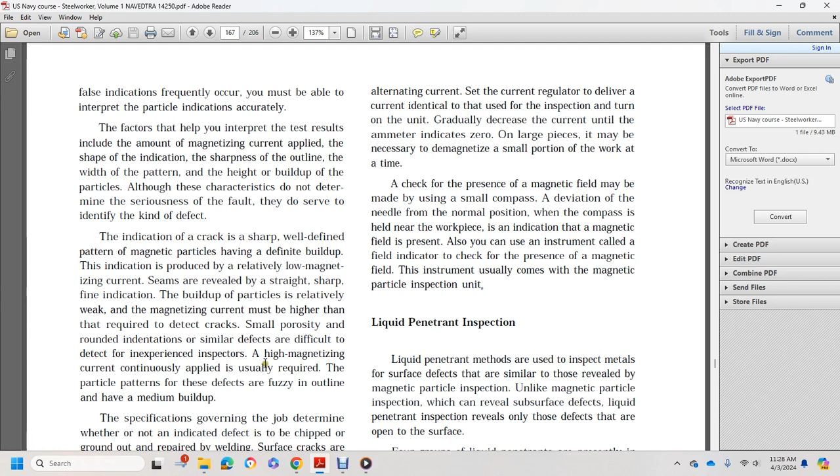Small porosity, round indentations, or similar defects are difficult to detect by an inexperienced inspector. High, continuously applied magnetizing current is usually required to reveal their position. These defects appear fuzzy in outline and have a medium buildup.

Specifications governing the job determine whether or not an indicated defect is to be chipped or ground out and repaired by welding. Surface cracks are always removed and repaired. Indications of subsurface defects detected with magnetic particle inspection are evaluated by the inspector. If there is an indication, the safest policy is to grind or chip down to solid metal and make the repair, unless the inspector can differentiate accurately between true and false indications.

The use of magnetic particle inspection should be restricted to detecting surface defects, for which application it is almost foolproof. After indicated defects have been repaired, re-inspect the area to ensure the repair is sound. The final step of magnetic particle inspection is demagnetizing the workpiece, especially important when the workpiece is made of high carbon steel.

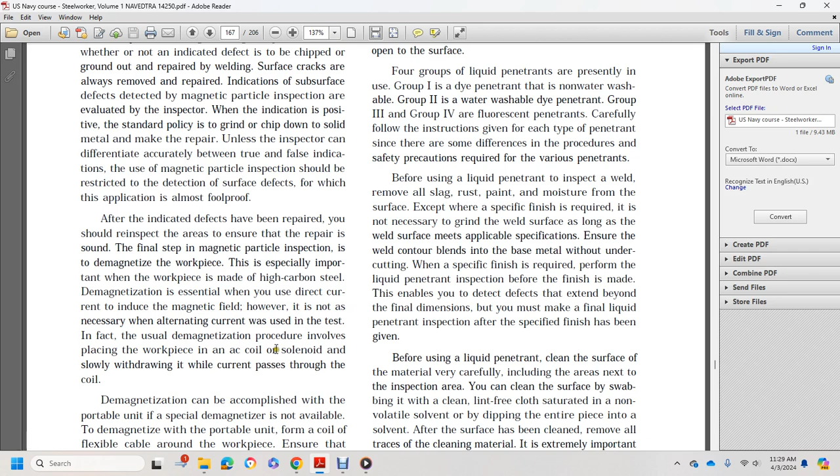Demagnetization is essential when using direct current to induce magnetism. However, it is not necessarily required when alternating current is used in the test. In fact, the usual demagnetization procedure involves placing the workpiece in an AC coil or solenoid and slowly withdrawing it while current passes through the coil. Demagnetization can also be accomplished with the portable unit if a specialized demagnetizer is not available.

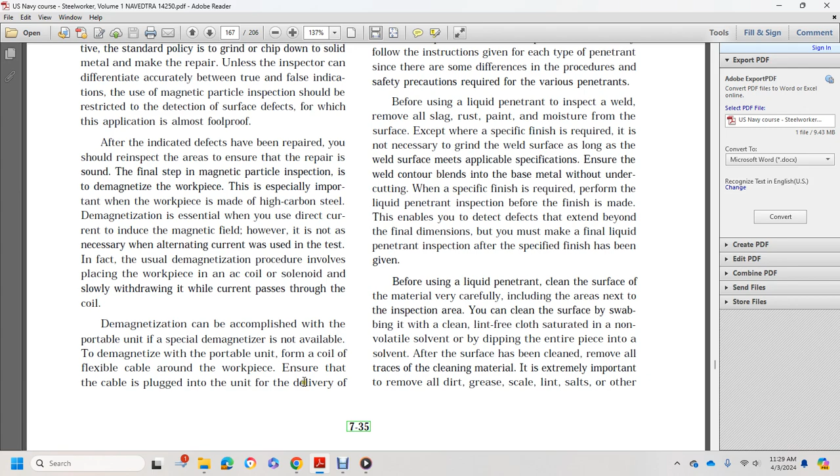With the portable unit, form a coil of flexible cable around the workpiece. Ensure that the cable is plugged into the unit for delivery of alternating current. Set the current regulator to deliver a current identical to that used for inspection and turn on the unit. Gradually decrease the current until the ammeter indicates zero. With large pieces, it may be necessary to demagnetize a small portion of the work at a time.

A check for the presence of a magnetic field may be made by using a small compass. A deviation of the needle from its normal position when the compass is held near the workpiece is an indication that a magnetic field is present. Also, you can use an instrument called a field indicator to check for the presence of a magnetic field. The instrument usually comes with the magnetic particle inspection unit.

Liquid penetrant inspection. Liquid penetrant methods are used to inspect metals for surface defects similar to those revealed by magnetic particle inspection. Magnetic particle inspection can reveal subsurface defects, but liquid penetrant inspection reveals only the defects that are open to the surface.

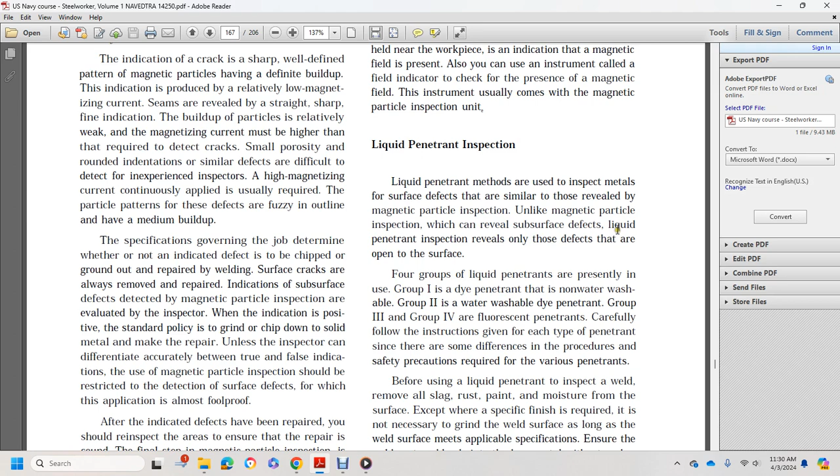There are four groups of liquid penetrants presently available: group 1, dye penetrants, non-water washable; group 2, water washable dye penetrants; and groups 3 and 4, fluorescent penetrants. Carefully follow the instructions given for each type of penetrant, as the procedures for the various penetrants differ somewhat. Safety precautions are required for the various penetrants.

Before using liquid penetrant to inspect a weld, remove all slag, rust, paint, and moisture from the surface. Except where a specific finish is required, it is not necessary to grind the weld surface as long as the weld surface meets applicable specifications. Ensure the weld contour blends into the base metal without undercutting.

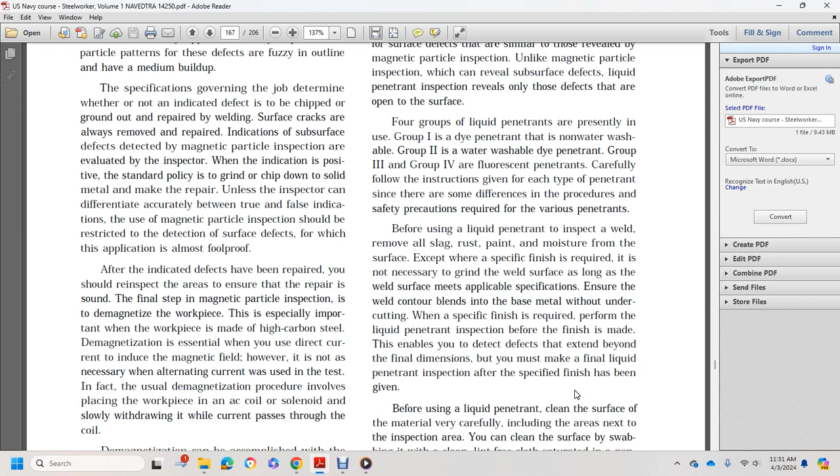When a specific finish is required, perform the liquid penetrant inspection before the finish is made. This enables you to detect defects that extend beyond the final dimensions, but you must make a final liquid penetrant inspection after the specified finish has been given. Before using liquid penetrant, clean the surface of the material very carefully, including areas next to the inspection area. You can clean the surface by swabbing it with a clean, lint-free cloth saturated with a non-volatile solvent, or by dipping the entire piece into the solvent.

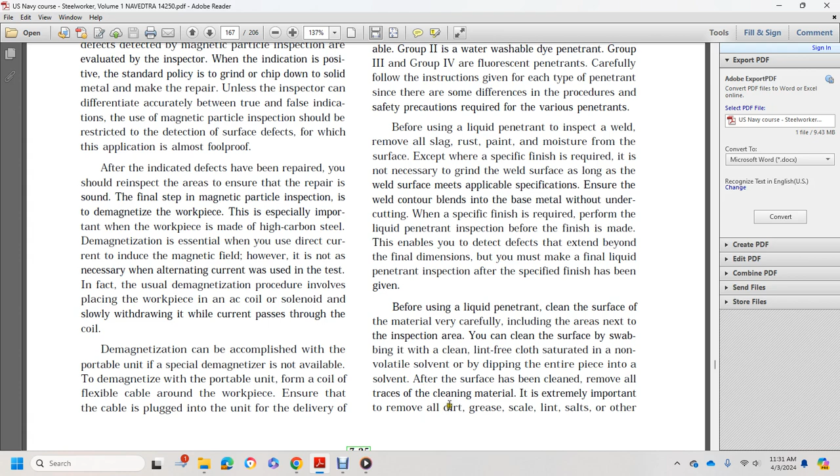After the surface has been cleaned, remove all traces of the cleaning material. It is extremely important to remove all dirt, grease, scale, lint, salts, and other materials and make sure the surface is entirely dry before applying liquid penetrant. Maintain the temperature of the inspection piece and the liquid penetrant in the range of 50 to 100 degrees Fahrenheit. Do not attempt to use liquid penetrant when this temperature range cannot be maintained. Do not use an open flame to increase the temperature, because some liquid penetrant materials are flammable.

After thoroughly cleaning and drying the surface, apply the liquid penetrant by spraying or brushing, or dip the entire piece into the penetrant, to allow the penetrant to soak into all the cracks, crevices, and other defects that are open to the surface. Keep the surface of the piece wet with penetrant for a minimum of 15 to 30 minutes, depending on the penetrant being used.

After keeping the surface thoroughly wet with penetrant for the required length of time, remove the excess penetrant from the surface with a clean dry cloth or absorbent paper towel, then with a cloth dampened with penetrant remover. Wipe off the remaining excess penetrant and allow the test surface to dry by normal evaporation, or wipe dry with a clean lint-free absorbent material. Avoid contaminating the surface with oil, lint, dust, and other materials that would interfere with the inspection.

After the surface is dry, apply another substance called the developer. Allow the developer, powder or liquid, to stay on the surface a minimum of 7 minutes before starting the inspection, leaving it no longer than 30 minutes, thus allowing 23 minutes to evaluate the results.

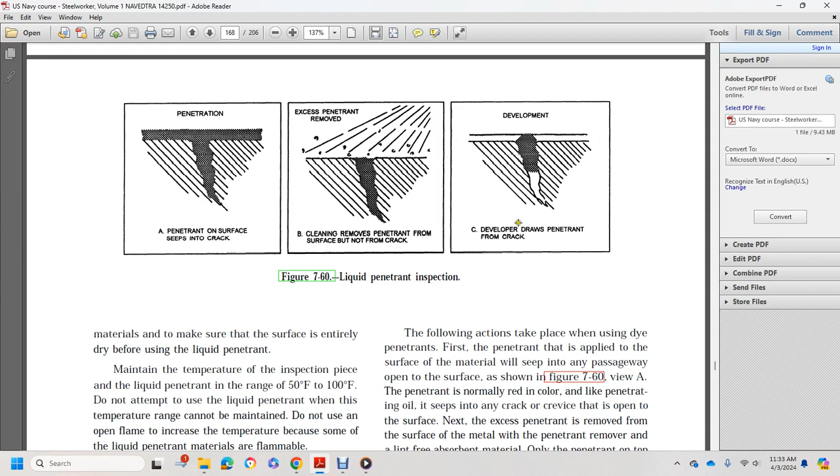Alright, this shows liquid penetrant inspection: penetrant on the surface seeps into the crack, cleaning removes the penetrant from the surface but not from the crack, and developer draws penetrant from the crack. The following steps take place for dye penetrant inspection. First, penetrant is applied to the surface of the material, where it will seep into any passageway open to the surface, as shown in figure 7-60, view A.

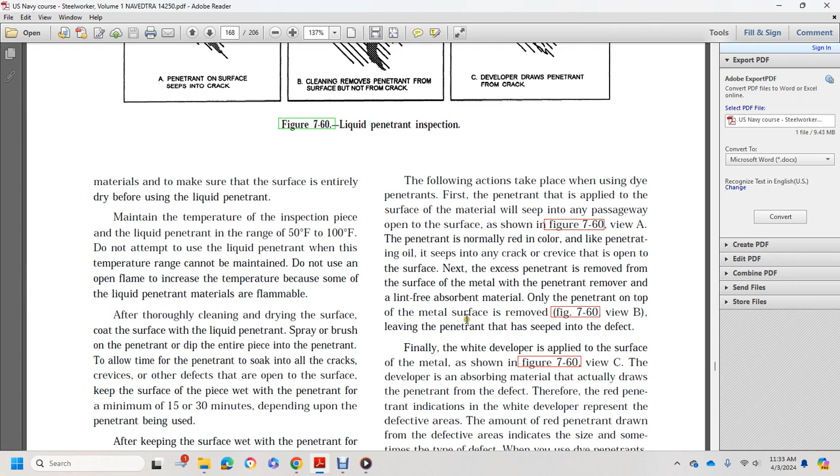The penetrant, normally red in color, like penetrating oil, seeps into cracks, crevices, or openings in the surface. Next, the excess penetrant is removed from the surface of the metal with penetrant remover and lint-free absorbent material. Only the penetrant on the top of the metal surface is removed, in figure 7-60 view B, leaving the penetrant that has seeped into the defect.

Finally, white developer is applied to the surface of the metal, as shown in figure 7-60 view C. The developer is an absorbing material that actually draws the penetrant from the defect. Therefore, the red penetrant showing in the white developer represents the defect area. The amount of red penetrant drawn from the defect area indicates the size and sometimes the type of the defect.

When using dye penetrants, lighting of the test area must be bright enough to enable you to see indications of defects on the test surface. Indications from liquid penetrant inspection must be carefully interpreted and evaluated. In almost every inspection, some insignificant indications are present. Most of these result from failure to remove all excess penetrant from the surface. At least 10% of all indications must be removed from the surface to determine whether defects are actually present or whether the indications are the result of excess penetrant.

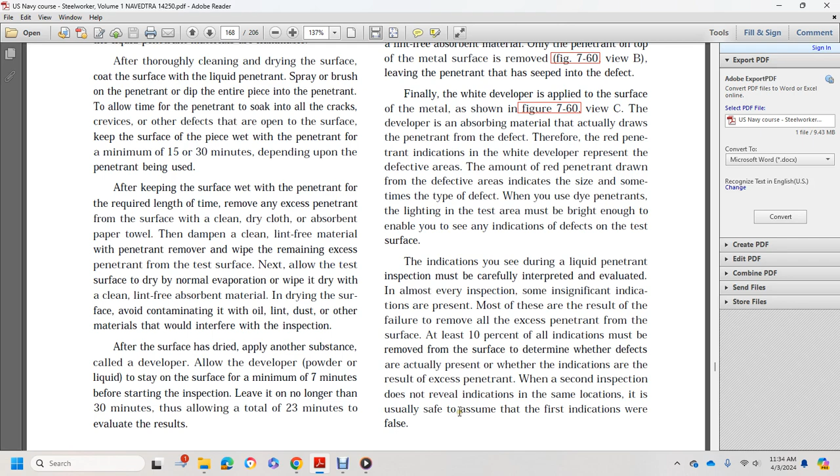When a second inspection does not reveal indications in the same locations, it is usually safe to assume the first indications were false. Remove all penetrant inspection materials as soon as possible after the final inspection has been made. Use water or solvent as appropriate. Some of the liquid penetrant materials are flammable. Do not use them near open flames. Do not apply them to any surface with a temperature higher than 100 degrees Fahrenheit. In addition, many solvents are poisonous in vapor form and highly irritating to the skin in liquid form.

Radiographic inspection. Radiographic inspection is a method of inspecting weldments using rays that penetrate through welds. X-rays and gamma rays are the two types of waves used. In the process, the rays pass through the weld and onto a sensitized film in direct contact with the back of the weld. When the film is developed, gas pockets, slag inclusions, cracks, and poor penetration will be visible on the film. Because of the danger of these rays, only qualified personnel are authorized to perform these tests. As Seabees, you will rarely come in contact with these procedures.

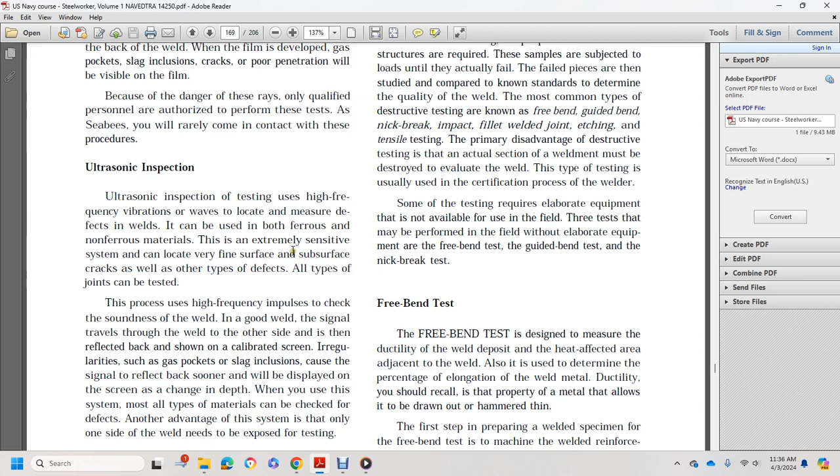Ultrasonic inspection. Ultrasonic inspection uses high-frequency vibration waves to locate and measure defects in welds and can be used with both ferrous and non-ferrous materials. This system is extremely sensitive and can locate fine surface and subsurface cracks, or other types of defects. All types of joints can be tested. The process uses a high-frequency impulse to check the soundness of the weld. With a good weld, the signal travels through the weld to the other side and is then reflected back and shown on a calibrated screen.

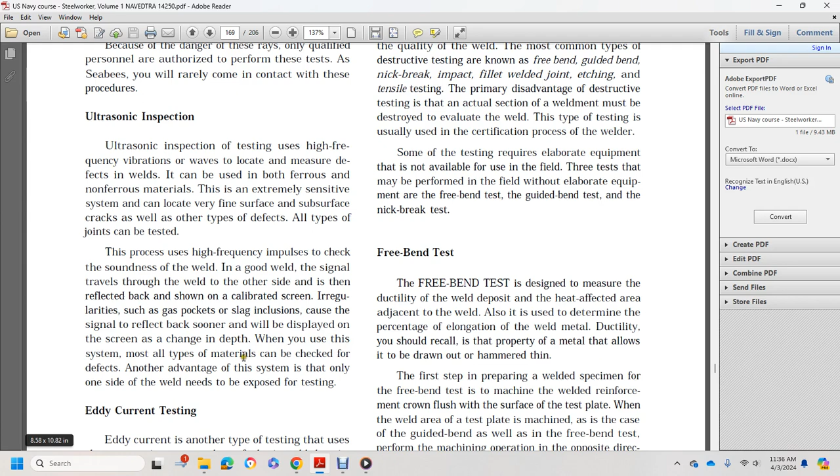Irregularities, such as gas pockets or slag inclusions, cause the signal to reflect back sooner and are displayed on the screen as a change in depth. With this system, almost all types of materials can be checked for defects. Another advantage of the system is that only one side of the weld needs to be exposed for the test.

Alright, eddy current testing. Eddy current testing is another type of test that uses electromagnetic energy to detect defects in weld deposits in both ferrous and non-ferrous materials. The NCF will rarely use this type of testing in the field.

Alright, eddy current testing operates on the principle that whenever a coil carrying a high-frequency alternating current is placed next to a metal, an electrical current is produced in the metal by induction. This induced current is called an eddy current. The test piece is exposed to electromagnetic energy by being placed in or near high-frequency AC current coils. Differences in the weld cause changes in the impedance of the coil, which are indicated on electronic instruments. When defects show up, the change in impedance indicates the amount of the change.